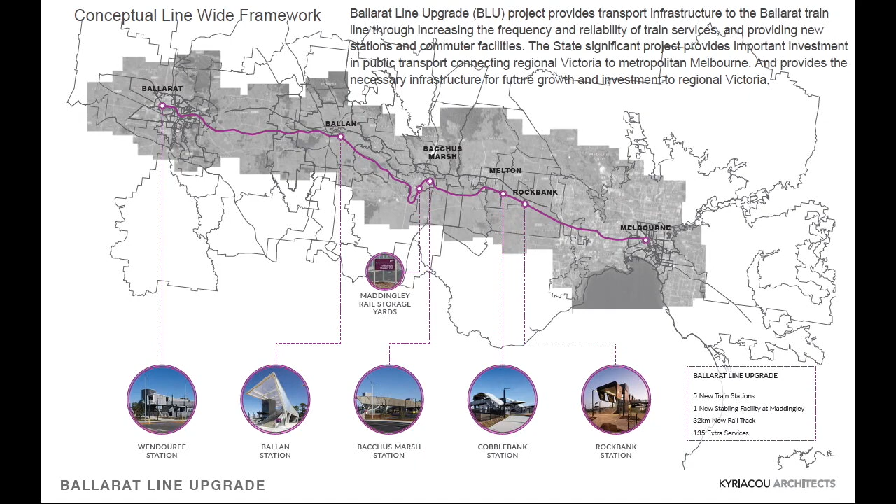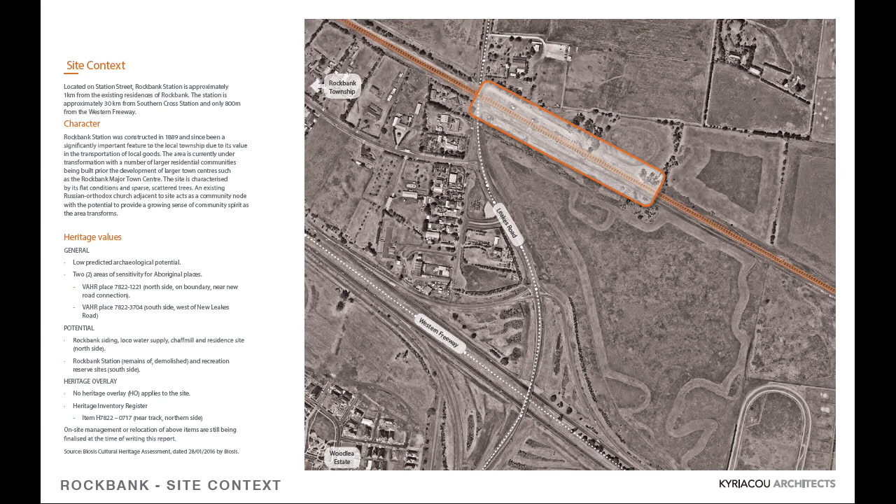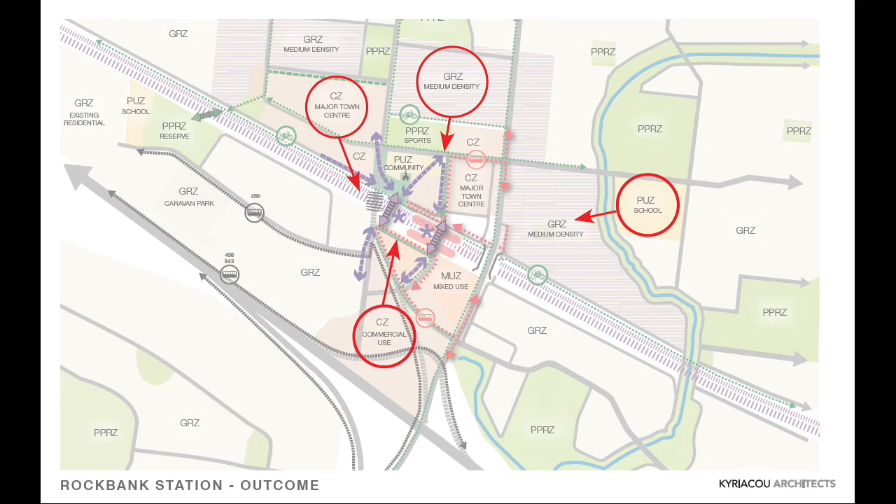The first one I'll start with is Rockbank train station. You can see here it's really a greenfield site with some brownfield over to the right. There is a precinct structure plan, and this is the location of the new station, and it was important that we provided linkages to the station and the planned future precincts.

This is our plan: the pedestrian bridge, the platforms through here, station forecourt, new parking and bus stops through here, so intermodal transport.

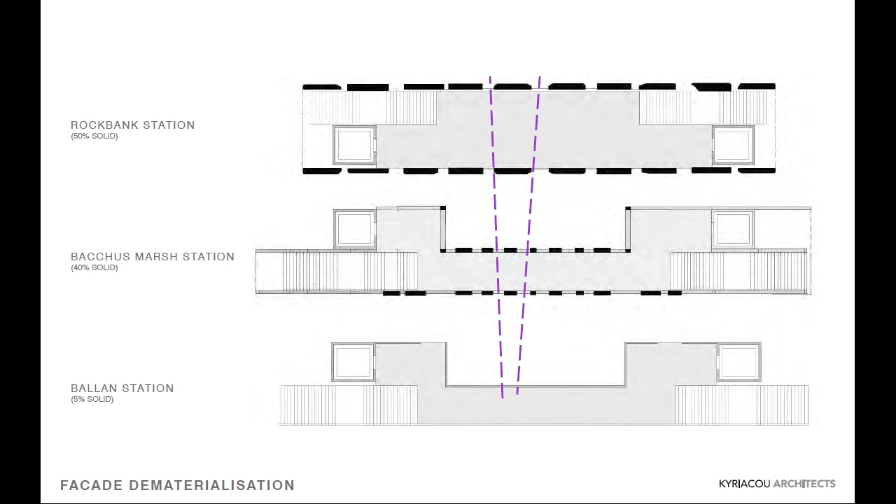The whole philosophy behind this is there's 5 different train stations. What we tried to do was dematerialise the facade and make them lighter as we moved away from central Melbourne. You can see this one here, the detailing is quite robust, almost military-like.

As we move closer to stations like Ballan and Bacchus Marsh, we really started to lighten up the facade materials using polycarbonate and perforated materials. You can see there the use of those materials.

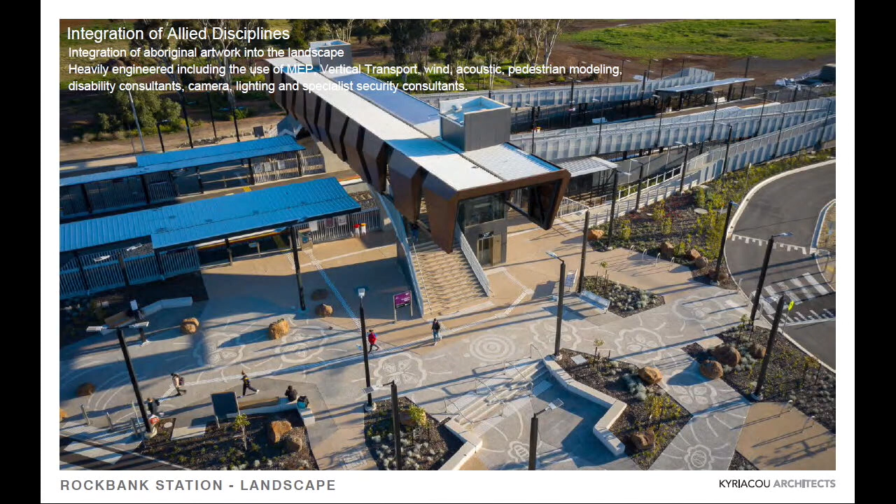Integration of allied disciplines: landscaping, and we use the integration of Aboriginal artwork. These projects are heavily engineered, involving MEP, vertical transport, acoustic, pedestrian, and disability consultants, camera lighting, and the list goes on - I could talk for another couple of minutes about that.

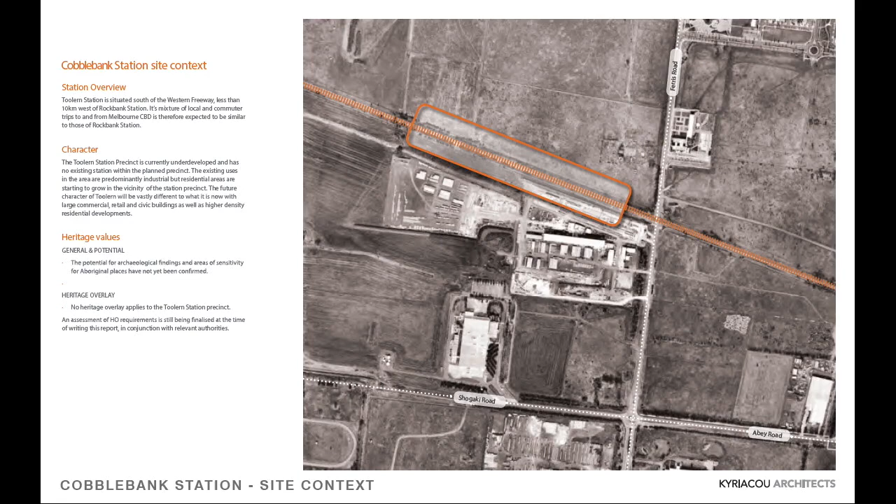This one here is Cobblebank Station, again a greenfield site with a little bit of industrial zone to the south, and the future urban design framework plan that we had to work with.

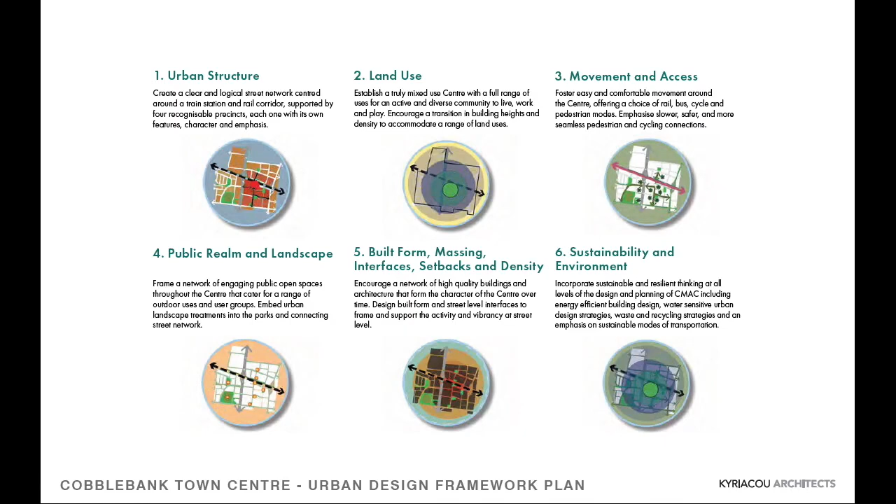We looked at how we would best deal with this project. We worked very closely with council and community groups on program resolution, and functional performance was assessed against the brief.

The stations have become important community spaces, cross-corridor urban connectors. They've become central to the planning of the future of urban centres, moving commuters between platforms and at the same time taking into account urban design framework to provide for local development and aspirations.

The upgrade of the stations facilitated the increase in frequency and reliability of train services. This one's important because not only did we duplicate the tracks through here, but there's also quadruplication of tracks planned through here on the other side.

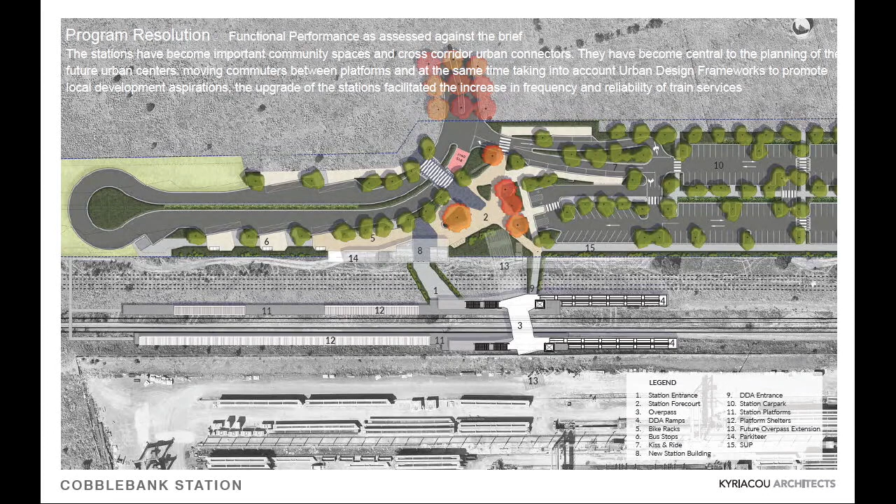So our new station platforms, ramps and pedestrian bridges needed to accommodate for these 2 new tracks that would come at a later stage. You can see there the planning and extension of those - new forecourt, new parking, bus interchange, quite a complicated station there.

That's a shot of the station. Very tight budgets, but finely detailed - we didn't have a lot to work with.

That's the overpass, and just a view through the perforations down into the new platforms. These were repeated across all stations through there.

Sustainable initiatives include a Green Star rating of 4, ISCA rating of 7, which is excellent, heat island effect reduction, collection of distinct waste, active transport facilities, low maintenance design and active ventilation.

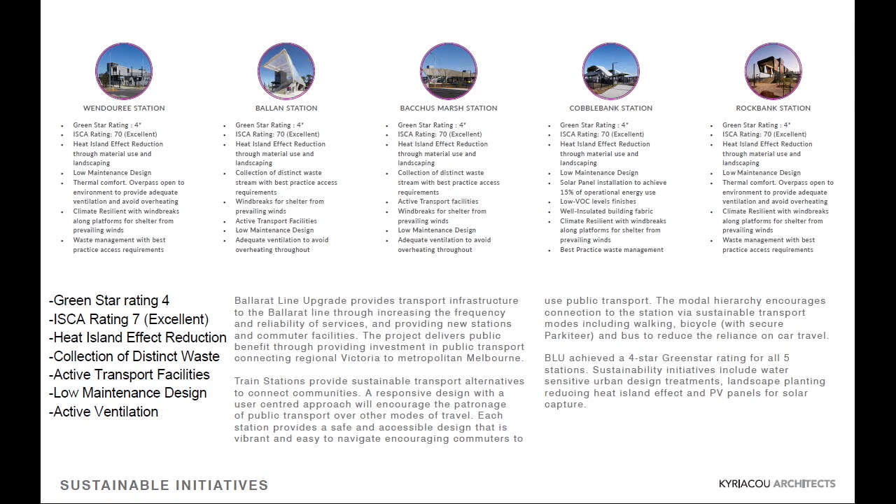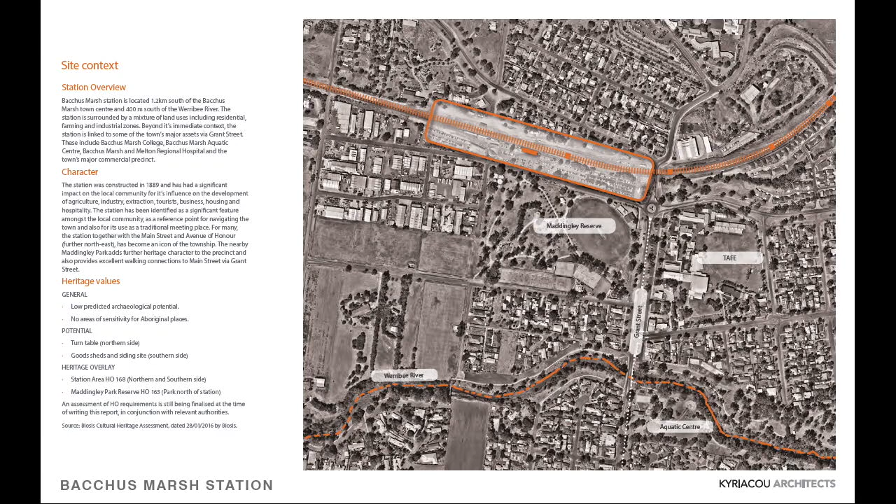I'll go through the Bacchus Marsh station now, which you probably all know. Bacchus Marsh station is a heritage station, located on a brownfield site, so we worked closely at understanding the different zonings and how we were to deal with that.

Prior to the refurbishment of the station, pedestrians had to travel up through here, so this was quite an important link.

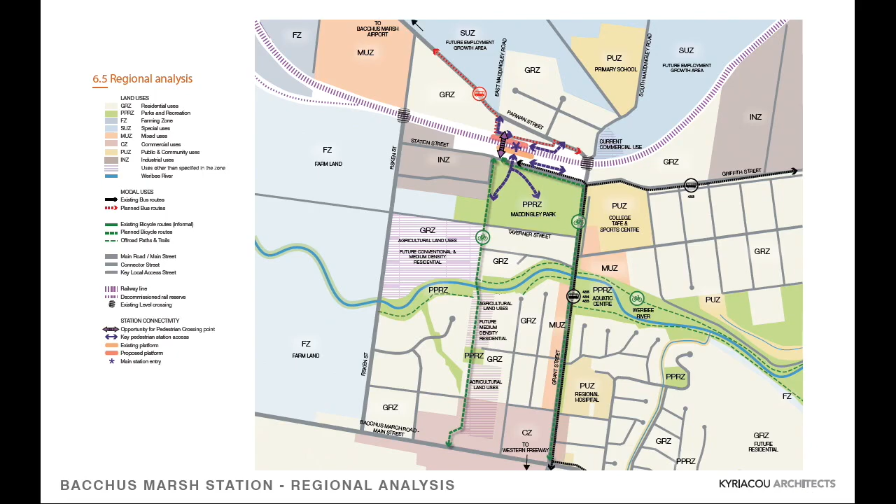Here is the existing heritage building and existing heritage turntable, along with the new pedestrian bridge, platform, ramps, new car park and facilitation.

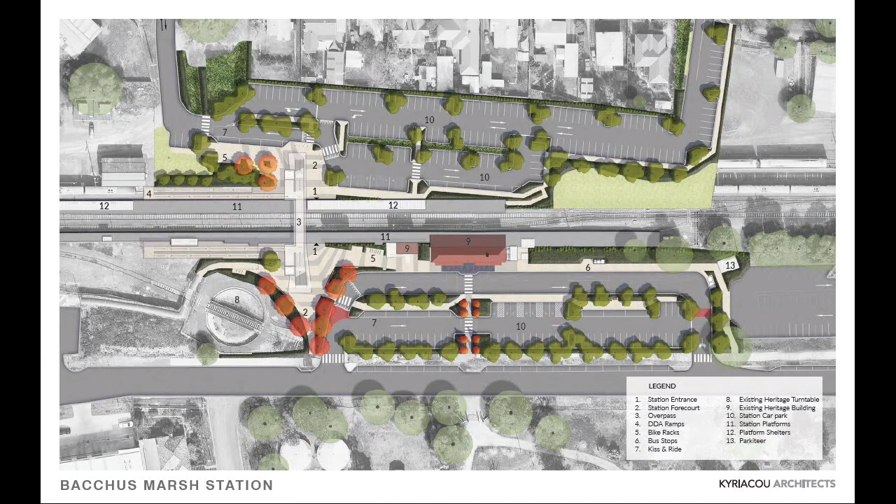On the other side, there's bus stops through here, kiss and ride, and disabled parking, showing the relationship to built form and context and accessibility to different modes of transport.

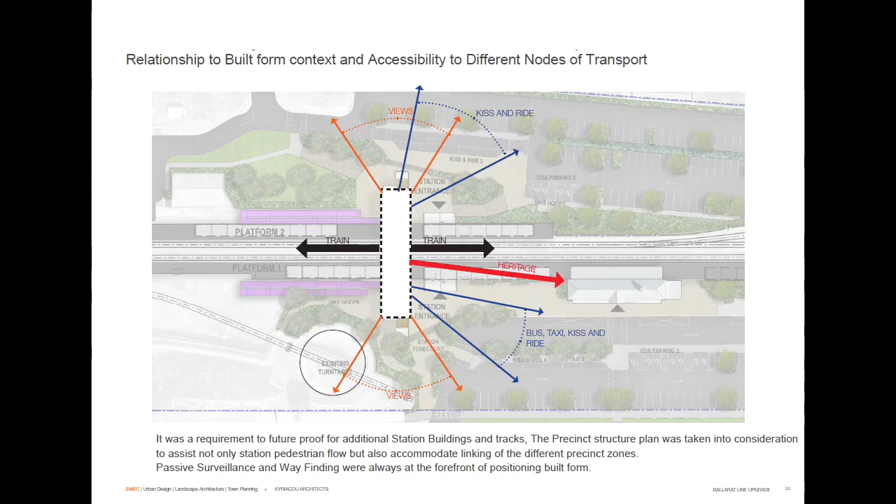It was a requirement to future-proof for additional station buildings and tracks. The precinct structure plan was taken into consideration to assist not only station pedestrian flow, but also accommodate linking of the different precinct zones. Passive surveillance and wayfinding were always at the forefront of positioning built form.

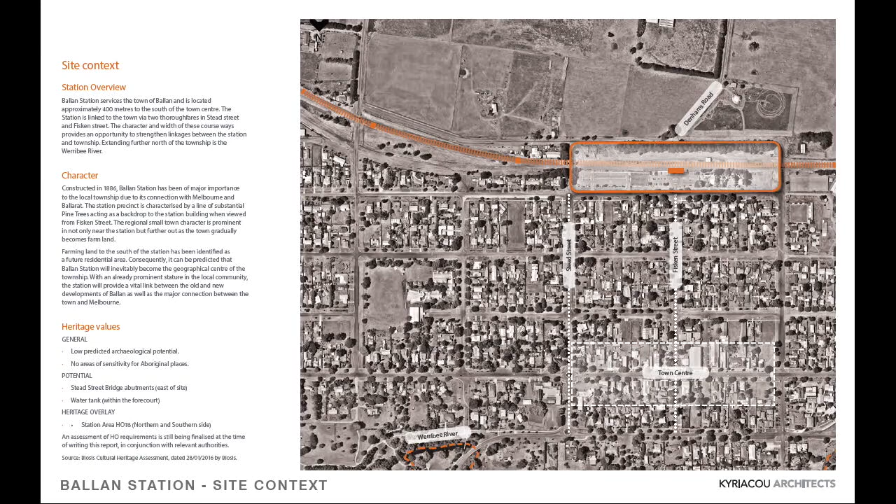There was future planning of residential and mixed use zones through here, so we really looked hard on how we could provide that connection.

Again, heritage building through here, and again, the relationship of the new works compared to the heritage.

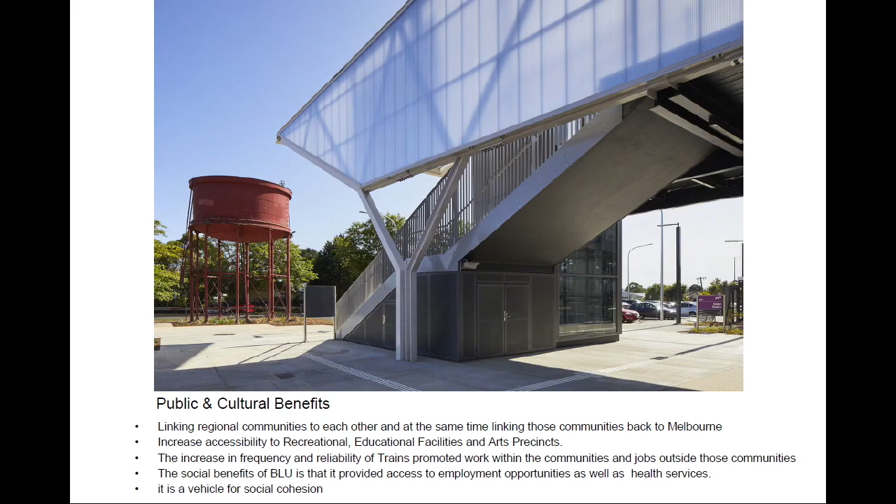Public and cultural benefits are pretty obvious: linking regional communities to each other and at the same time linking those communities back to Melbourne, increasing accessibility to recreation, educational facilities and art precincts, increasing the frequency and reliability of trains, promoting work within the communities and jobs outside those communities, better social benefits and health services, and it's a vehicle for social cohesion.

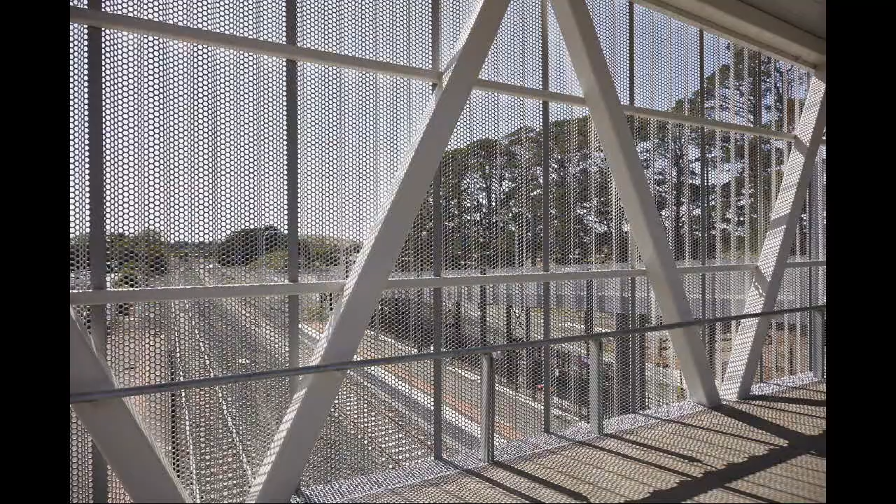I've included this one to show the framing of the heritage water tank through there. That's a rezoning of the land that's taking place there.

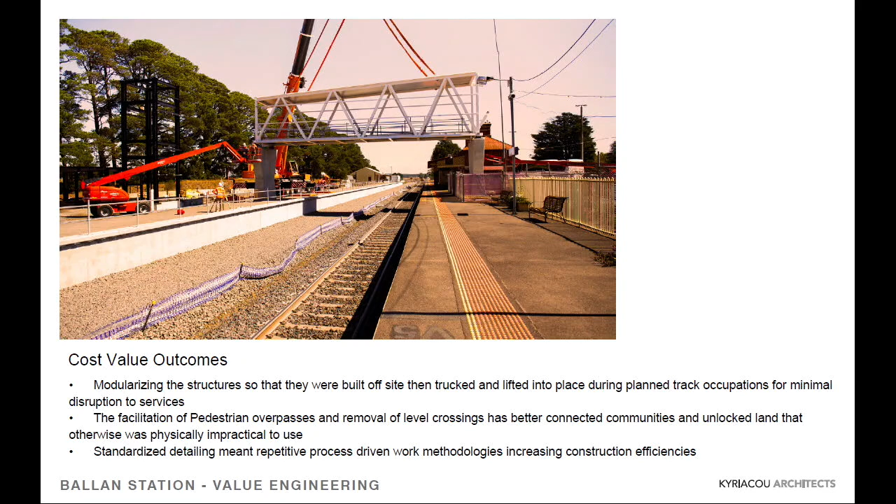Cost value outcomes: modularising structures so that they were built off-site and lifted into place, facilitation of pedestrian overpasses and removal of level crossings for better connected communities, and standardised detailing meant repetitive process-driven work, methodologies increasing construction efficiency.

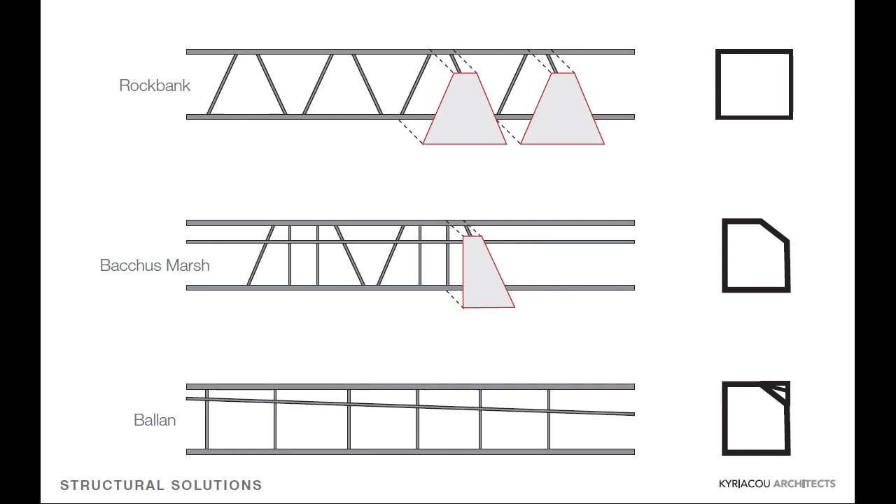This one is just a shot of the trusses, and that just shows how we changed the truss on every station. These are some of the structural solutions we implemented.

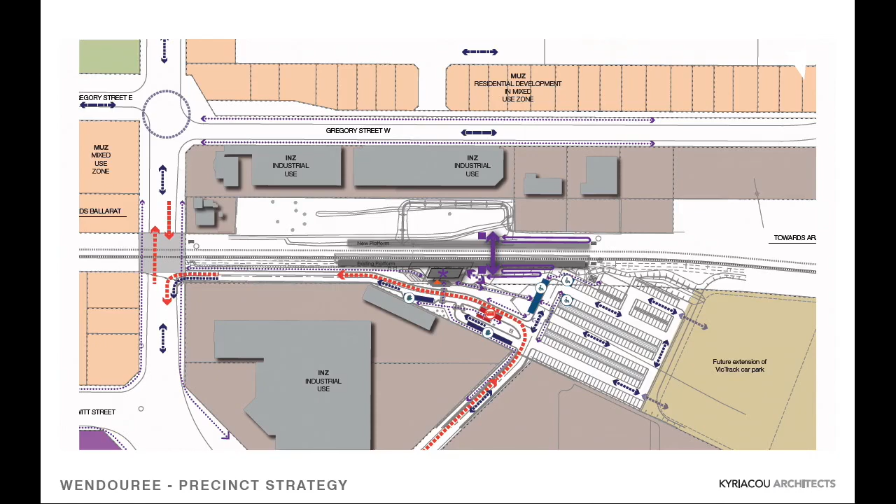Wendouree Station is the last one. I know we're running a little bit low on time.

This one here, we've got 2 new tracks in the future to go through here, so you can see the allowance of the connection of a pedestrian bridge to link into that was quite important.

They've all got disabled ramps.

And just to finish up, these station upgrades and pedestrian bridges have become community connectors, intermodal transport facilitators, end and start of trip transport indicators, urban design markers, and precinct planning enablers.

An unexpected outcome was that as a result of the pandemic, regional Victoria became more accessible to metropolitan Melbourne. Regional Victoria house prices have increased and become more attractive places to live. Those cities experiencing the most growth are those with good accessible public transport.